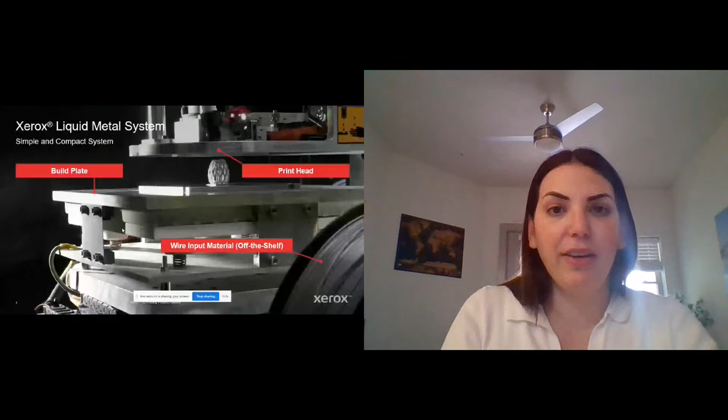And maybe instead of talking about it, there's a 1-minute video that just might be easier to show you.

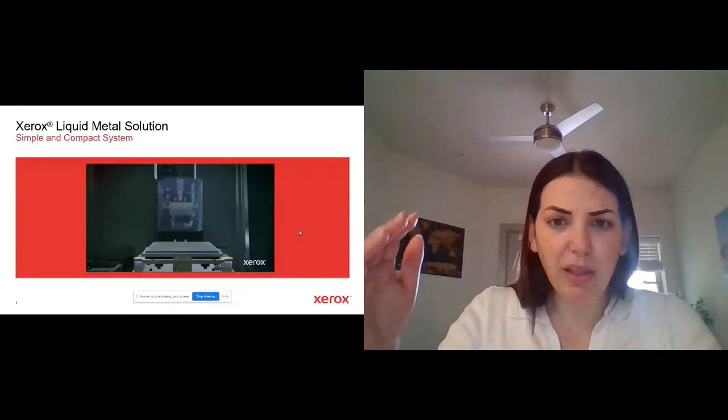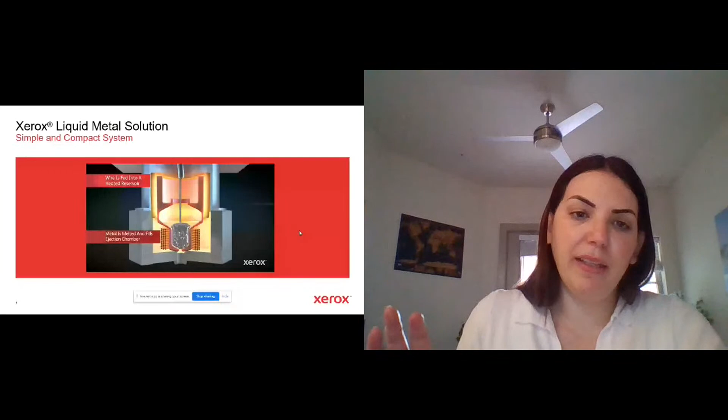So again, we built this with production grade in mind, having the reliability, repeatability, and quality that you can rely on for your supply chain. We take off-the-shelf, non-proprietary metal wire, which is a very good differentiator. We load the wire, and then the wire is fed into the reservoir, which is heated, and then basically the metal wire is melted, and we eject it drop by drop, building the part layer by layer.

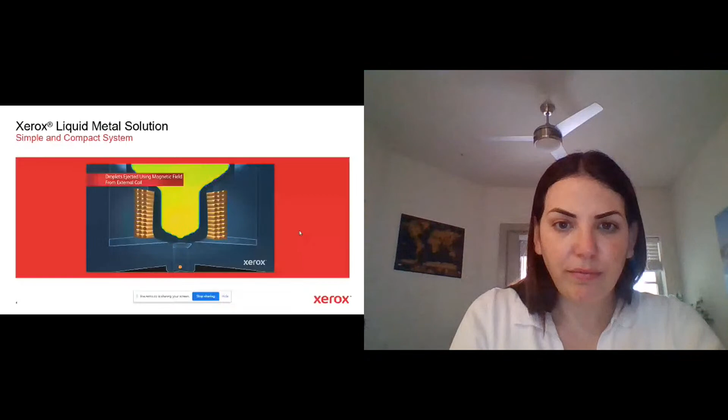And to ensure a lot of it, we've also wrapped it with pretty advanced software capabilities, a lot of which are coming from PARC, the Palo Alto Research Center. We'll talk about the minimal post-processing as well and how we get to it, because I think this is one of those big pain points in 3D printing that's in the back of everybody's minds. And we've tried to address it head on.

So as I was saying, our biggest thing is that the liquid metal printer uses wire over powders. In the metal 3D printing market today, as you guys know, over 80% of the market—the vast majority of it—is dominated by powder-based printers, which have a lot of advantages but also have a lot of challenges that are preventing wider adoption. And for us, cracking the code on how to use wire instead—first of all, the most obvious thing is material cost, because it's non-proprietary, off the shelf, so it's much more cost effective.

Because it's non-proprietary, off the shelf, standard wire, we also get known properties. Actually, we get really good material properties. When you look at our strength, when you look at the elongation at break, and the density, we're able to get to really good properties.

Cycle time is much faster. One of the more cumbersome, painful steps in powder bed fusion is powder removal. So with our solution, you don't need it. It's much easier and faster, and therefore, again, cost effective.

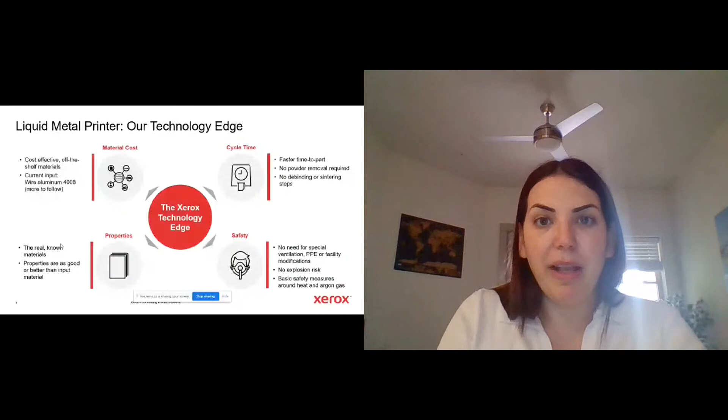Now, I mentioned this is based off the Vader Systems acquisition two years ago, but it's also important for me to stress that we've made very significant strides in the last two years since the acquisition. So if anybody has seen parts from the Vader printer two to three years ago at FormNext or Rapid, back when we still went to conferences, I think you'd be pretty shocked at the level of progression that Xerox has made in the last two years.

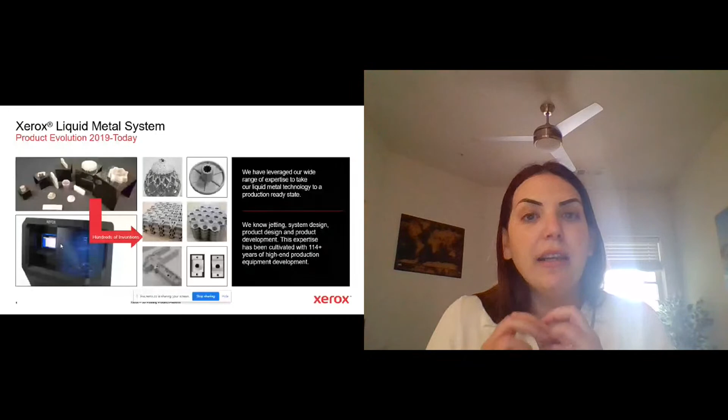I think this is when the Vader acquisition, the combination of the Vader technology with the Xerox capability, really became interesting, because Xerox has a lot of experience in jetting physics, in system design, in making business critical equipment that needs to be reliable and repeatable. And we kind of took all these capabilities, all this knowledge, and put it onto the very interesting Vader technology of liquid metal to make it a production grade system. And in the process, obviously hundreds of inventions to get us to the part quality and the printer quality that we're at today.

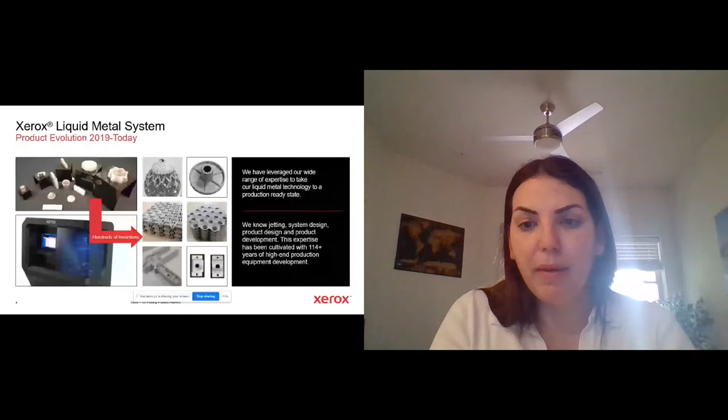So one of the things we had in mind, I was talking a lot about the technology benefits and how it lends itself to distributed manufacturing. So I think if you want to lend yourself to distributed manufacturing, you have to be much easier to use and easier to operate. So I want to give you one example in mind when we're talking about that, and this is the part removal process.

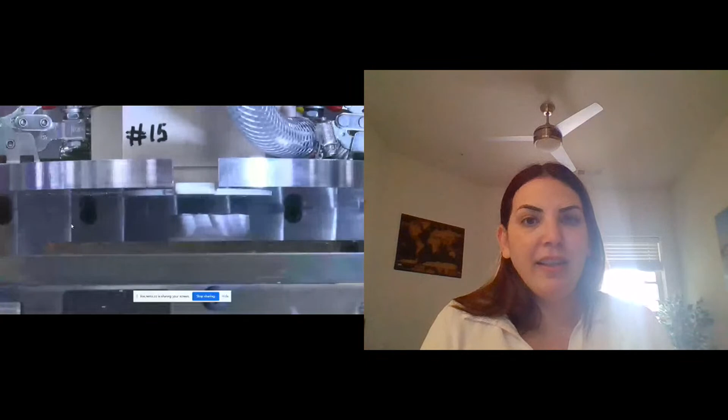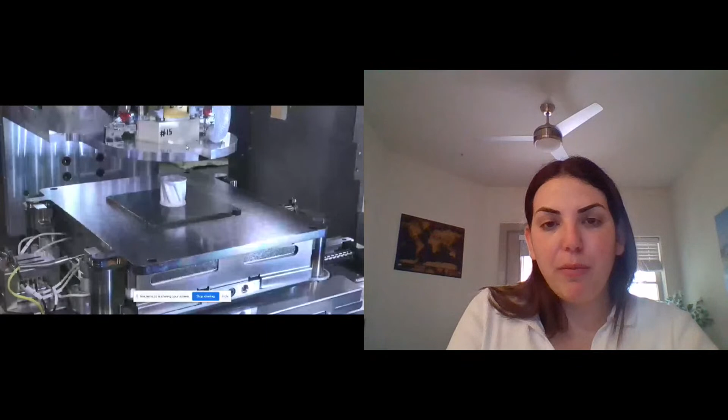So obviously this is filmed on an R&D rig in a lab, that's why it's kind of open. If we'd done it on the real printer and not an R&D rig, we wouldn't have been able to get these beauty shots. But here again, you can see how it works. I think the really cool thing is the part removal off the build plate. If you're familiar with a lot of 3D printing technologies, you have to saw off the part off the build plate, and again, that's cumbersome, it doesn't scale. With ours, and this is real time, it literally takes 5 seconds in a bucket of room temperature water, and within 5 seconds, that part's been removed off the build plate.

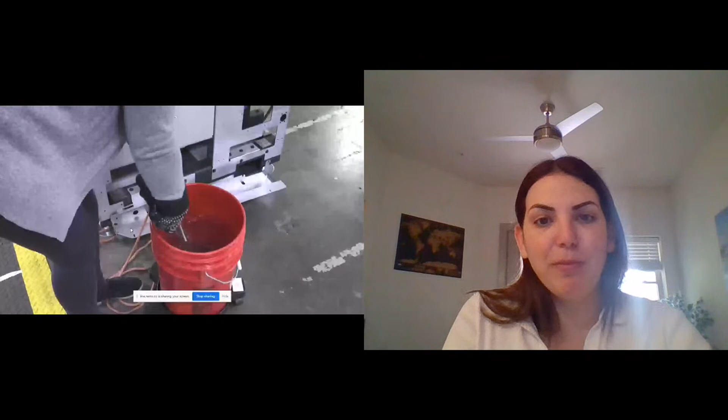And I think really the cool thing is, and you're seeing it here, I ran it too fast, is the part quality as it comes off the printer. So we get to really good part quality, I'd call it sand casting or better surface finish. And again, much easier removal. And in all these things, it doesn't translate just to ease of use, it translates into money. Everything translates into money.

The more time you have highly paid, specialized engineers working on it to get the part off the build plate, that's time you're not getting the part yet, and that's money all this is costing you.

And so with that, at Xerox, we're big believers in what we call eating our own dog food. That means we walk the talk and implement our solutions for ourselves. So we trained our engineering teams, educated them that we have this solution, these are the capabilities, these are the parts you can make with it.

Next time you have an issue with a part in the supply chain, let us know, let's check it out, maybe we can help. And so as we educated the engineers, we started getting parts we were having issues with, again especially in 2020, and we said let's see what we can do.

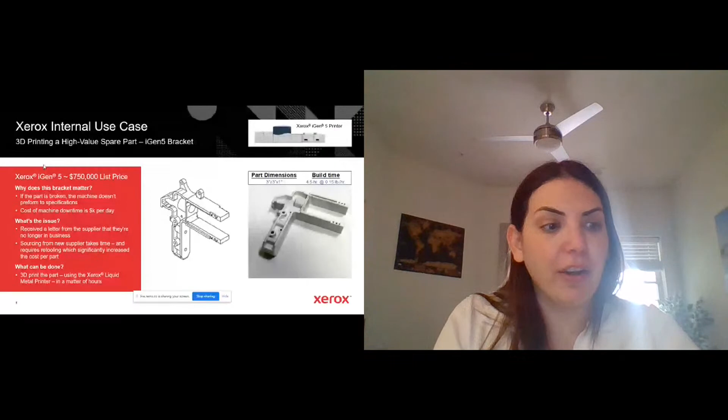I can assure you the iGen 5 team isn't cutting me any slack just because I'm also part of Xerox. They're thinking about their own P&L and the cost. So we had to show them not only does this work from a part quality perspective, but it also makes business sense for you to do it.

And as we analyzed it with them, we looked at the true total cost of ownership. A lot of companies and customers we talk to just compare the green bars, the unit manufacturing cost—how much it costs to get it from the supplier who does it with metal casting versus the cost to 3D print it on the liquid metal printer. What they're ignoring is the blue and orange bars, which can be very, very large.

These represent things like: with that supplier of the bracket, you can't just buy it on demand for metal casting, you have minimum order quantities. It could be that the minimum order quantity is 1,000 units, but the iGen 5 is 15 years old—we don't need that many.

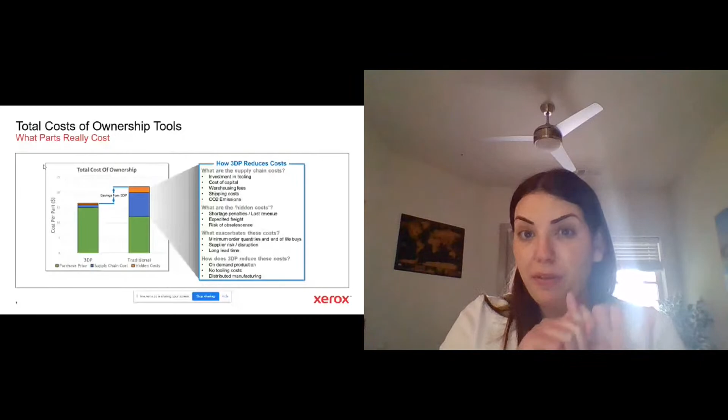So you're putting upfront cash on things you don't need, and then you have to store them—inventory and warehousing cost. And then you're going to have to scrap some of them because you probably don't need the whole 1,000, since it's a low volume spare part. So you paid for nothing and accrued the inventory cost, and now you have the obsolescence and scrap cost.

So we quantified all these things, and we've developed some pretty nice advanced tools for our internal use to give true estimates to management and the business side to make informed decisions. With this specific bracket as an example, we showed that by incorporating 3D printing into the supply chain, we can reduce the cost for Xerox by 21% when you factor all this in.

Anyone in supply chain will tell you reducing the cost for a part by 21% off the gate is remarkable. These are really good numbers. By the way, as a side comment, not only can we reduce the cost by 21%, actually by incorporating 3D printing here, we're also reducing the carbon emissions by 43%.

So a lot of companies, Xerox included, are very much committed to taking a hard look at how we can reduce carbon footprint. And for this specific bracket, by incorporating our printer versus metal casting, which is what was used up until now, 43%, which is fantastic.

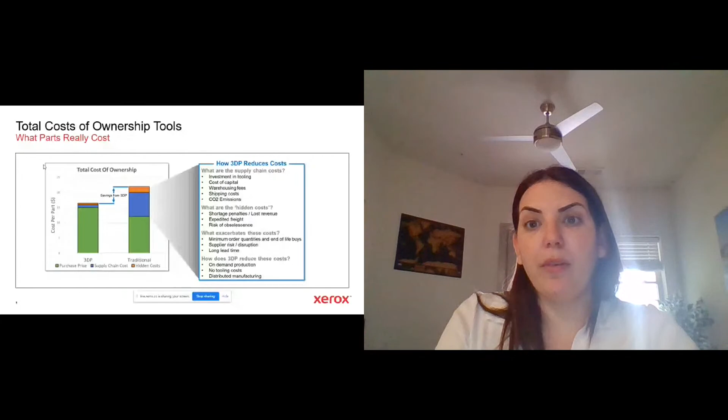But the team made us sweat even more because they said, okay, let's not just compare you to metal casting. Why should we pick your 3D printer? Let's compare it to others as well. So we wanted to get an external analysis to have it unbiased. We worked with the Barnes Group, which I'm sure many of you are familiar with. And the Barnes Group benchmarked us against other technologies, traditional and 3D printing.

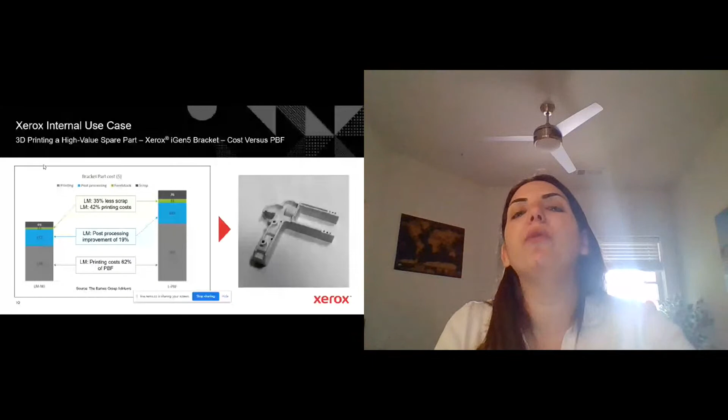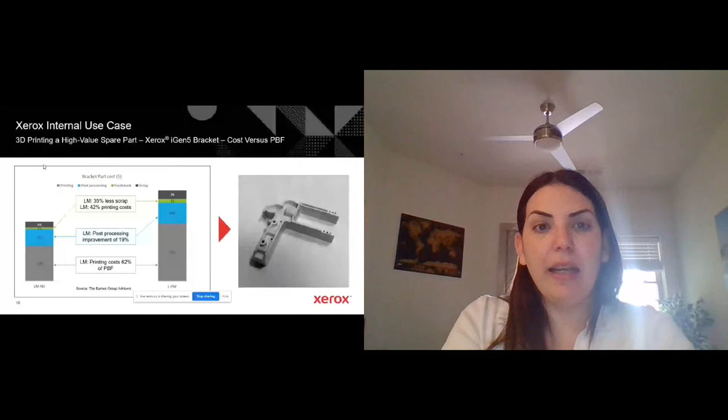I'm showing here powder bed fusion comparison because, as I was saying, powder bed fusion is over 80% of the metal market. So while I don't think we're in competition with powder bed fusion, I think we're complementary technologies. I realize this is what we're most often going to be benchmarked against. So this is an example. And here we're up close to 40% cheaper. And by the way, 40% faster on the cycle time. So faster and cheaper and good quality. And again, all this has been done for us by the Barnes Group.

Being Xerox, we have a mindset of you need to make it easy for the customer. It needs to be easy. It needs to have a great customer experience. So that's what we're constantly working on. And part of that is to make it less cumbersome, less labor intensive, simpler part removal from the plate, no powder removal. All these things we think are very important.

Infrastructure cost and safety also go hand in hand, right? You don't need to do all these costly facility modifications. You don't have the safety concerns that cost you a lot of money on an ongoing basis. And one last point is material waste. So actually we visited a customer earlier this week and they told us that in powder bed fusion, 35% of the material is wasted. You can't reuse the powder if you're going to make real parts. So, for every $100, $35 goes to the garbage. So that's a great advantage that we have.

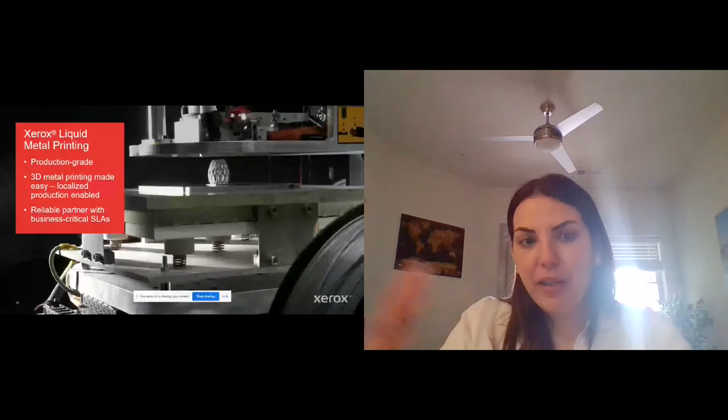So just to recap and then open it up for questions, we built this with production grade in mind, something you can rely on for your supply chain resiliency, right? If you're going to need a backup generator, that backup generator should work when you need it. We really thought about how to make it easy so it can lend itself to distributed manufacturing and create a seamless, easy customer experience. And again, this all ties into us being Xerox, and we understand what that means to be that trusted partner, to meet those business critical SLAs.